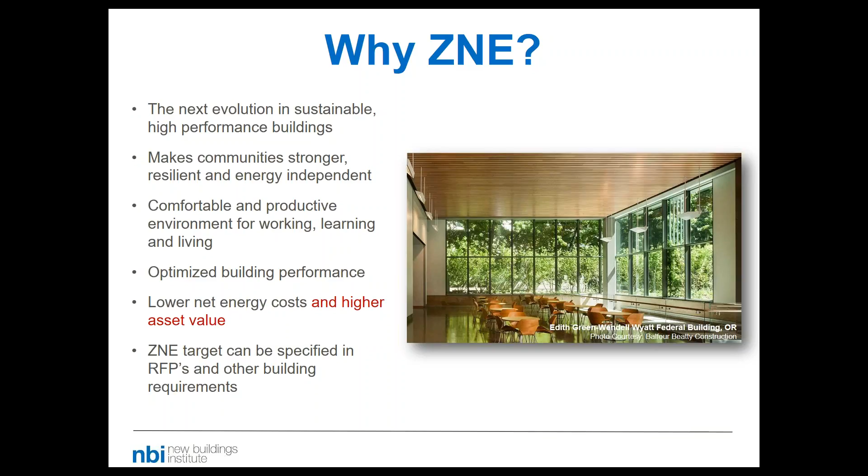You may be able to tell through this webinar topic that ZNE is gaining momentum. Via our Getting to Zero database, we've been able to track the progress of ZNE buildings. So for some background really quickly, the three types of ZNE buildings are ZNE Verified, which is a building that has 12 months of meter data that shows zero net or positive energy production over those 12 consecutive months.

ZNE Emerging, which is a building that has publicly stated a goal of ZNE, but has not yet demonstrated that they've achieved that goal. This building may be in the planning or design phase, currently under construction, in operation less than 12 months, or has not yet quite documented the ZNE performance over 12 consecutive months. And lastly, ultra-low energy is a building that has demonstrated significant energy reduction and technical progress towards goals of energy reduction, even though they may not have pursued ZNE originally or on-site renewables. Next slide.

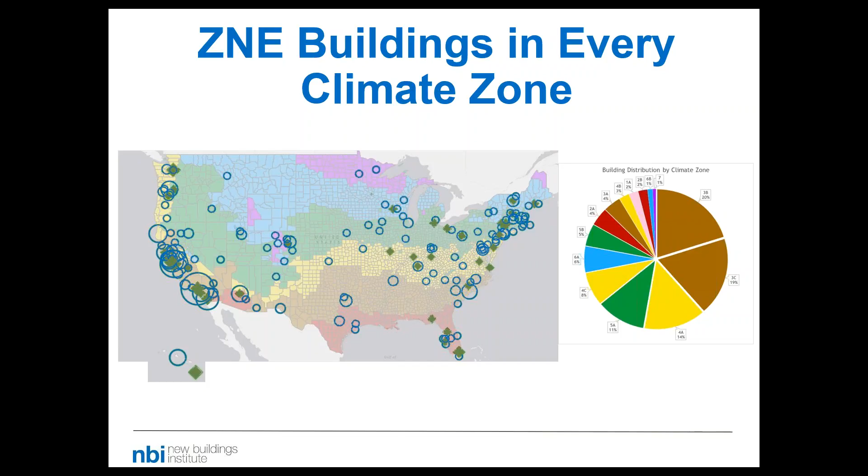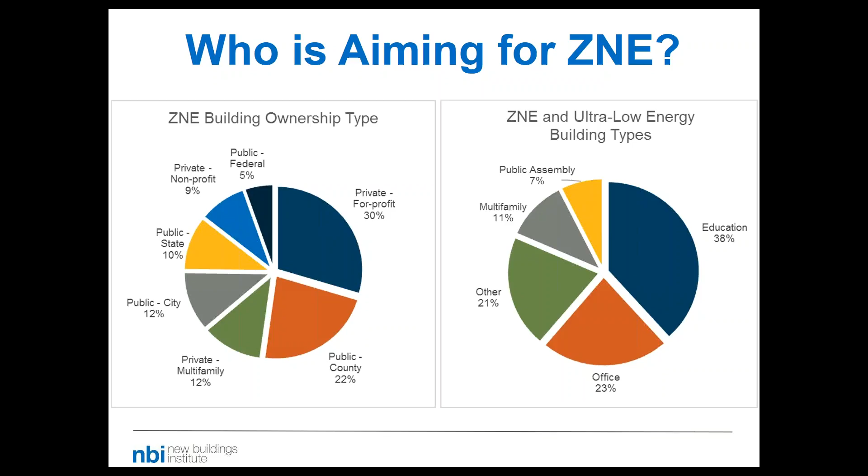So why schools? Why not? They are an ideal building type with low occupancy. They have sufficient land and they're owner occupied. Going ZNE is fiscally responsible with taxpayer dollars, and it puts more money back into the schools because of lower building operation costs and reduced need for energy. ZNE schools have increased student performance with better occupant health, attendance, and improved teacher satisfaction and retention.

They're more resilient to severe weather events and can create safe havens for the community. And as ZNE is not just about design but about operation, schools are the ultimate early adopters and set the example for future generations as operators of ZNE buildings. Schools house the next generation of environmental leaders, so going ZNE can provide hands-on project-based learning opportunities for continued student growth. Next slide.

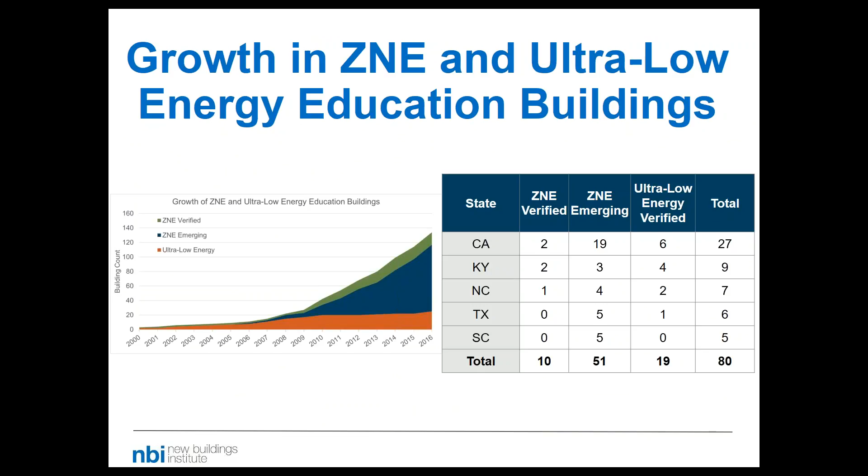ZNE schools are growing at a rapid pace. Since 2015, the number of ZNE verified, emerging, and ultra-low schools has grown by almost 40%, with California, Kentucky, North Carolina, Texas, and South Carolina leading the way to ZNE schools. Next slide.

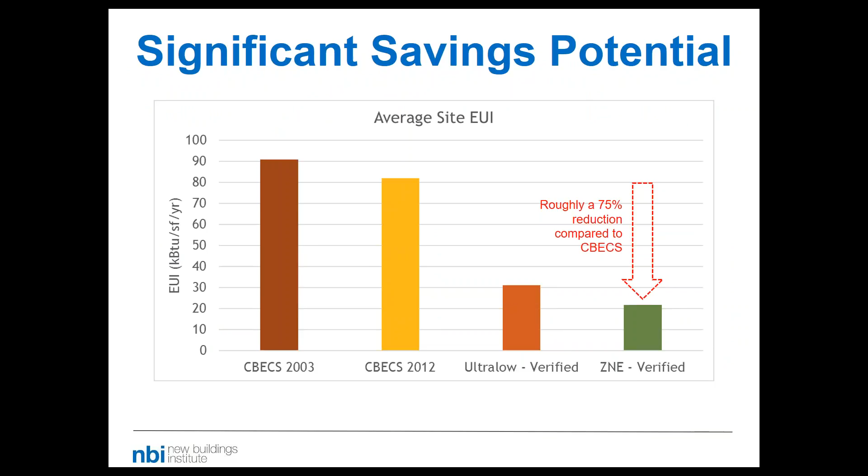The buildings or schools that are successfully designed and operated to ZNE can see roughly a 75% reduction in EUI compared to CBECS. This offers a significant reduction in energy use and a significant savings potential. Next slide. And because of these high-performing efficiency strategies, the average ZNE building has an EUI of 22 before renewables. That is across the ZNE verified, emerging, and ultra-low energy buildings spectrum. Next slide.

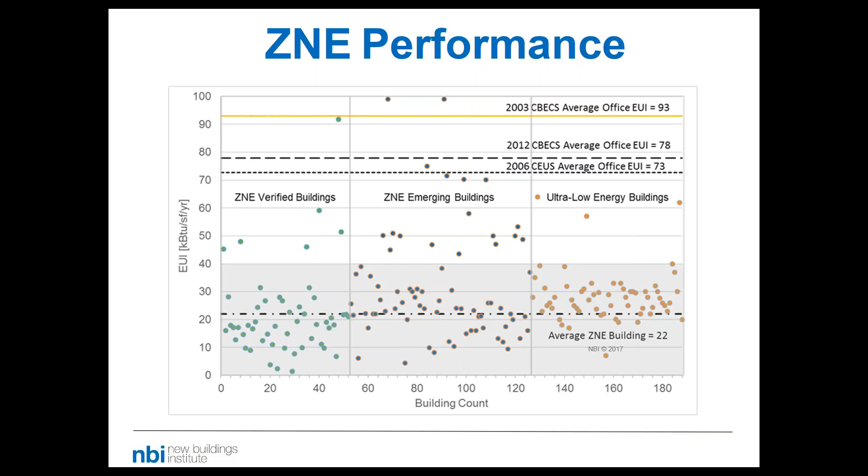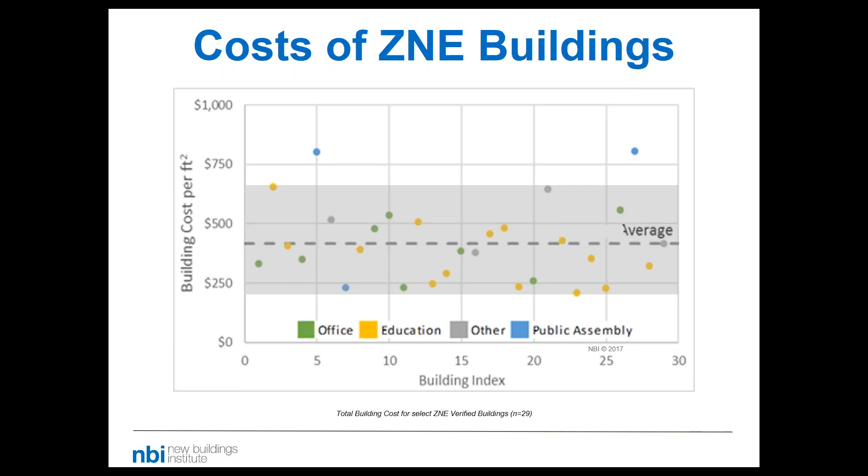Building cost varies based on location, building type, commodity cost, and the labor market. But the key takeaway here is that the costs are driven by many factors, including the growth of the ZNE market. ZNE buildings do incur an extra cost for renewables. However, our research suggests that ZNE can be delivered for around a 0 to 10% increased incremental cost. Next slide.

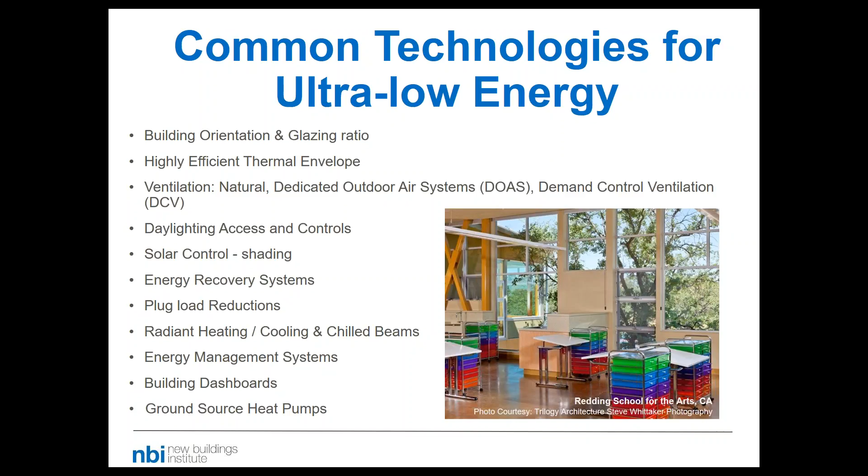ZNE is tough to get to. However, there are many resources out there and available through NBI and many others. Next slide. These resources out there are here to help you in whatever part of the ZNE process you may be in. Whether you're just starting and formulating your initial plans, have some ideas, have approached your district or your building owner, operator, or have finished design and construction and need to move on to the operations portion.

I mentioned our Getting to Zero list when I was talking about the database. NBI publishes a list every year of all zero net energy buildings. Again, if you have a project to share, please either submit through our online registry or by emailing info@newbuildings.org. Next slide.

NBI has also published a communications toolkit for engaging key stakeholders and to communicate effectively the reasons for going to ZNE. This originally was developed for the state of California but provides excellent resources for anyone across the nation or even in other countries looking to go ZNE.

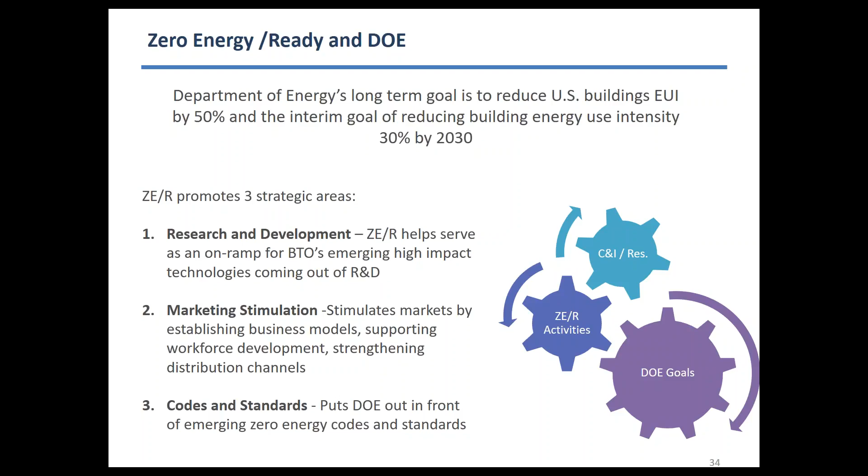So what does the buildings market, commercial market, look like right now? There are about 5.6 million commercial buildings comprised of about 14 principal building types, and out of that, 1 million new buildings were constructed between 2000 and 2012. And there's really no slowing down.

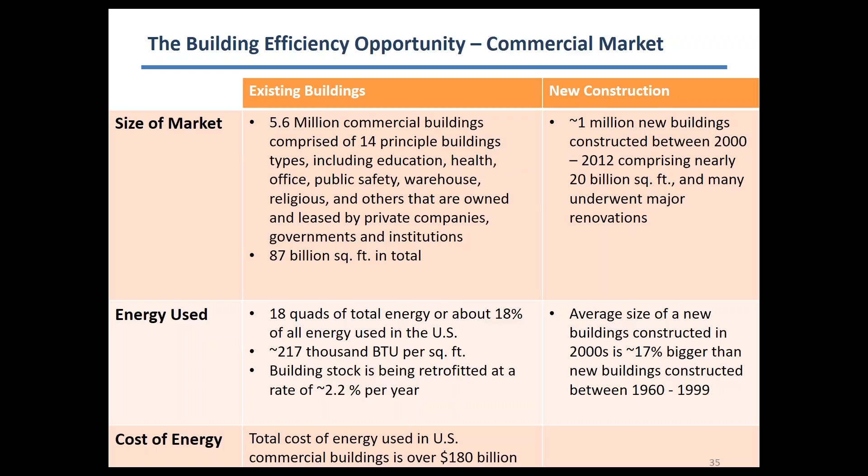And the average size of the building constructed in the 2000s is 17% bigger than new buildings constructed between 1960 and 1999. So what this means is, with more large buildings in the market, the more the demand for energy, which is also making energy efficiency a critical part of the work that we do. Next slide.

So once the Department of Energy started looking into the zero energy concept, we found that there was a lot of confusion in the marketplace. And to avoid that confusion, we felt it was our place to come up with a common definition for zero energy buildings. And we published this common definition in September 2015. And we didn't do this alone. We worked with a lot of other market leaders, including ASHRAE, NBI, AIA, NIBS, and the National Renewable Energy Laboratory. Next slide.

And I'd like to mention that if you Google common definition for zero energy buildings, you should be able to find this information. If not, the link is there. And again, this presentation is archived. So what is a zero energy building? In aspiring to build a zero energy building, you must first focus on energy efficiency. So you have to reduce your energy consumption by 50 to 70% from your code.

And we realize the gap between 50 to 70 is vast, but it's because we're trying to cover the entire country, and different states use different codes. But basically, you need to first target your energy efficiency, and once you meet the 50 to 70% less than code, then you are a zero energy ready building. And beyond that, if you are able to supplement the rest of the energy with renewable energy, then you are a zero energy building. So moving forward, please know that we are working on both zero energy ready and zero energy buildings, as we feel that energy efficiency is equally important.

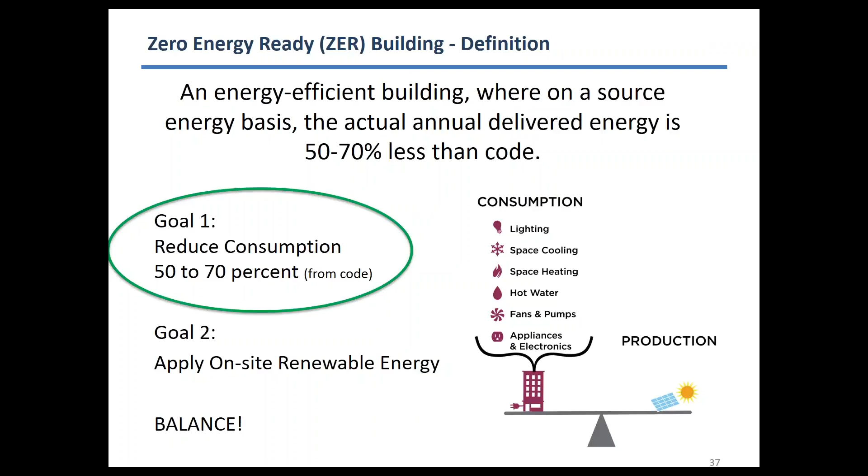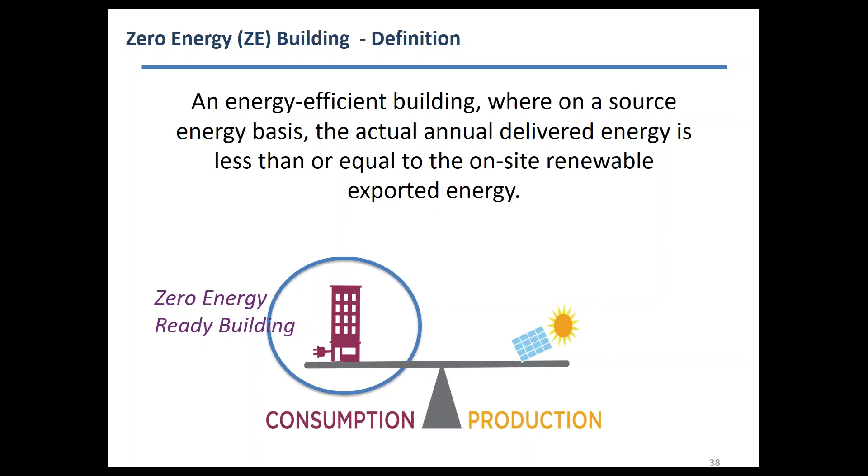Next slide, please. So by definition, a zero energy building is an energy efficient building where on a source energy basis, the actual annual delivered energy is less than or equal to the on-site renewable exported energy. And again, if you were to meet just the efficiency piece of it, you are a zero energy ready building. And when you add the renewable piece, then you become a zero energy building. Next slide, please.

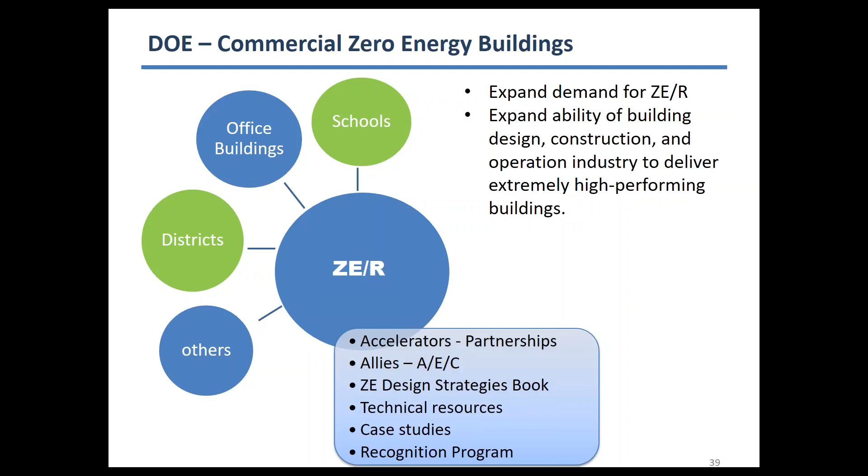So our goal at DOE when it comes to zero energy or zero energy ready buildings is we want to expand the demand, but while expanding the demand, we want to build the framework necessary to get there. So we're working on technical resources such as the case studies for pilot buildings. We're working on design guides, and then we've decided to focus on schools and districts, and I'll go into details about that. But we are also working with other partners from the engineering and architectural community, but also through other programs such as accelerators, to build and move the market.

Next slide. So we'll start with zero energy accelerators. Our vision, the bigger vision, what we would like to see is we want K-12 schools to provide healthy dynamic learning environments and resilient community assets that have zero to minimal energy costs. And so through what we call the Zero Energy Schools Accelerator program, we launched this program last December. We want to show that zero energy schools are possible within conventional construction budgets, but also we want to help the partners that we have recruited, states and districts, establish EUI targets to drive their energy efficiency, then also provide resources to accelerate their zero energy goals and get them there faster than they would if they didn't get our support.

Next slide. So Riley just went over this. There's a huge opportunity in working with schools. In short, one in five Americans sets foot each day in a school, and it's a unique opportunity to educate and shape the views of the new generation. But at the same time, outside of salaries, energy costs are the second largest cost to our schools. That's a figure of about $6 billion, and some say it's much higher, but that's the figure that we have right now.

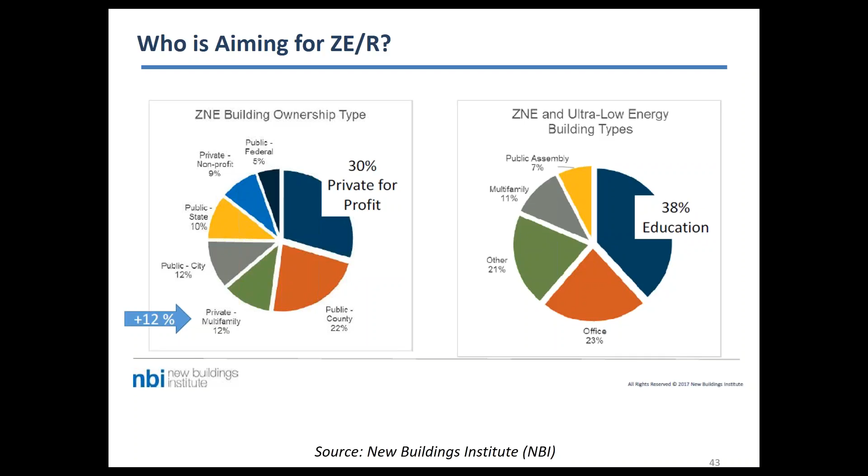In our approach in working with schools, one of the first things that we asked is: is it really possible to build zero energy schools from coast to coast within the US? So to do that, we worked with our National Renewable Energy Laboratory, NREL, to conduct a technical feasibility study. The study focuses on what technologies are required to achieve zero energy ready, and what energy use intensity, or EUI, targets schools need to focus on to get to that zero energy goal. This study was published in November 2016, and the technologies are prioritized across the building subsystems such that design teams can readily integrate the ideas. Next slide, please.

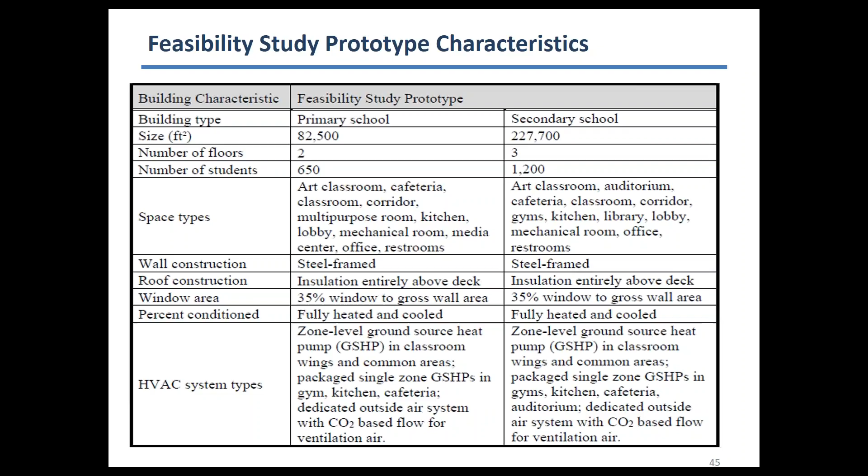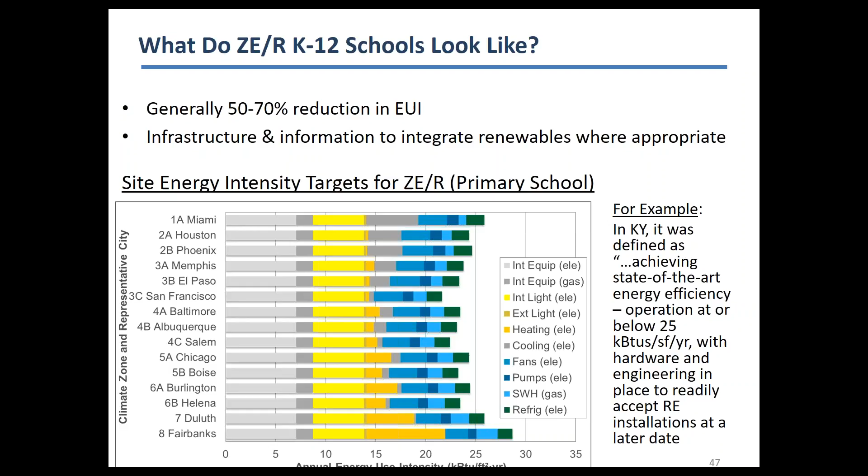Next, we will talk about zero energy districts. By districts, what we mean is a self-identified geographical area, and our vision for these districts is communities with energy efficient, resilient, cost-effective buildings and infrastructure that are common throughout the U.S. And with that, our goal is we want to work with these districts in their master planning, but also their financing and ownership structure. And so through that, we are looking to study their case studies, best practices, and pilot

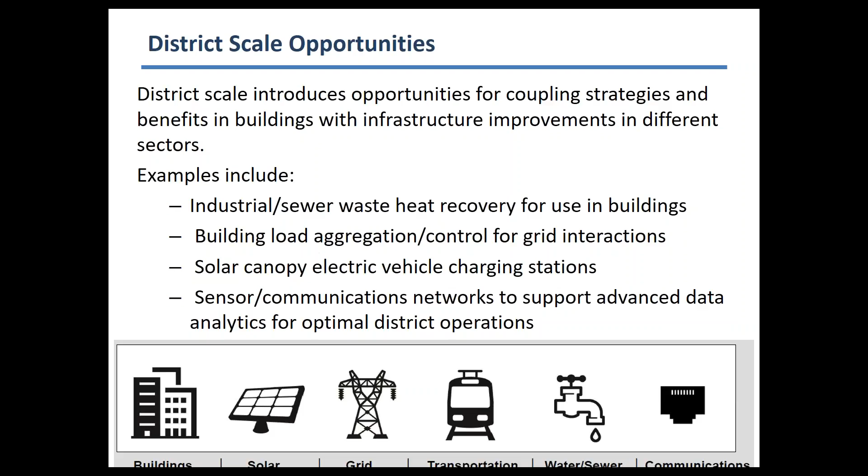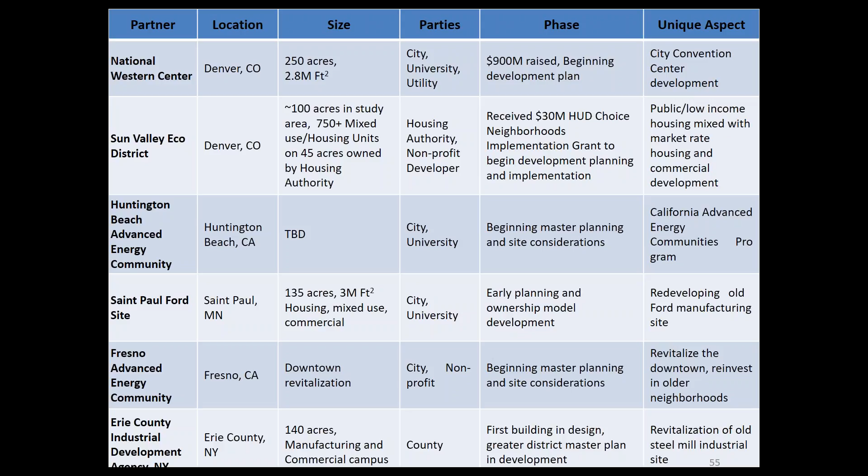And we're studying these projects so we can learn from them, learn best practices, but also how can we replicate these kinds of projects throughout the U.S. Next slide, please. So the tallest oak in the forest was once just a tiny nut in the ground. So basically what I'm trying to say is the zero energy concept is still new. And as Riley mentioned earlier, the majority of the buildings are starting to be built just in the past year. So we've seen a lot of growth, and the market is transforming, but we have to start from somewhere.

So I hope we're all in this on the road to market transformation, where these buildings are commonplace rather than a one-off. Thank you.

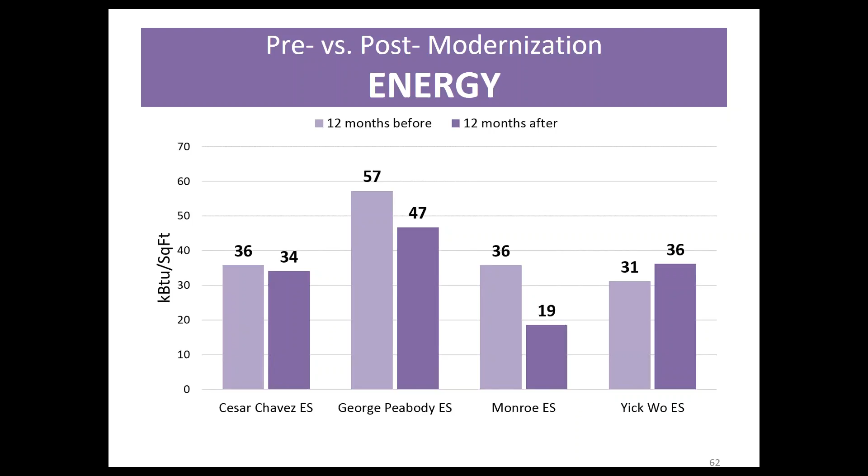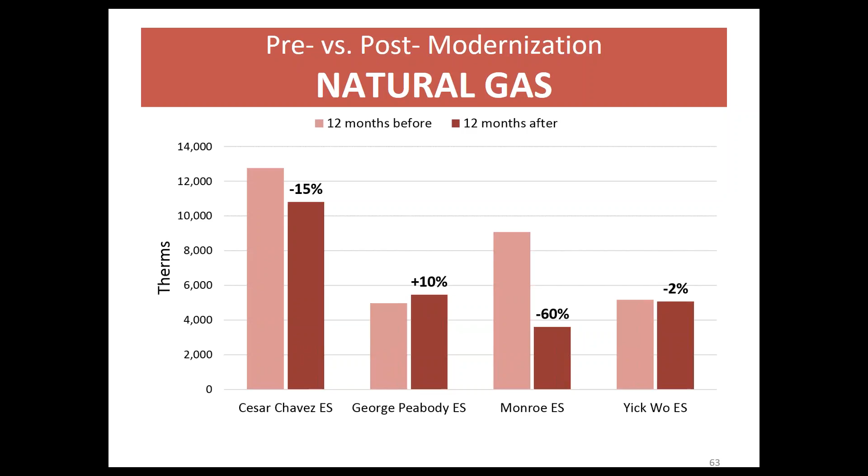Next slide. And we've done really well in natural gas. We're a coastal climate, heating dominant for energy usage. We actually don't have very much air conditioning in the school district at all. And so for the most part, we've done a good job of focusing on natural gas. The Monroe Elementary School example here, we had switched off of and actually gone to electric heating. So that was why that big drop occurred. Next slide.

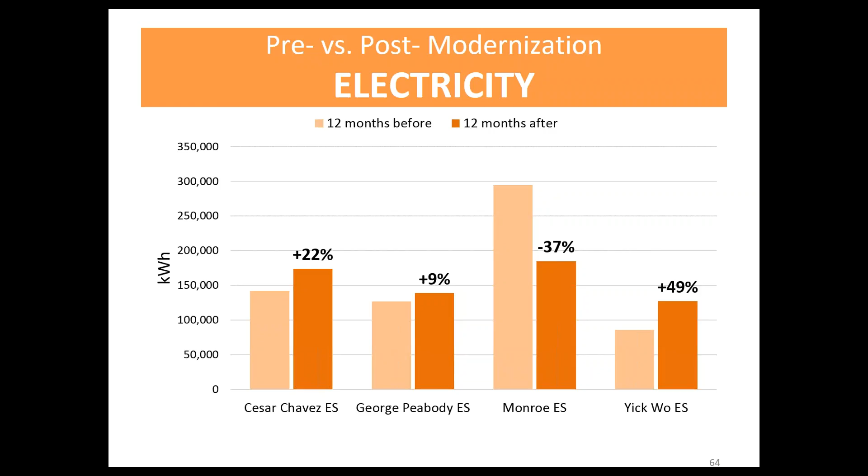And here we are on electricity. Electricity is a different story. Because our buildings are very old, some of them reaching close to 100 years old, you're bringing all these new buildings up to code, which means you're adding exhaust fans, you're adding new pumps, you're having new laptop carts, new plug loads. And for the most part, what we've seen across the board is that overall, in the EUI, we do a good job. But on the issue of electricity, we really have to focus in on this. Now the big caveat here is these schools were built and constructed right before the LED price curve dropped off the cliff, and so we totally anticipate once we get LEDs into new buildings, we'll see a major reduction. Next slide, please.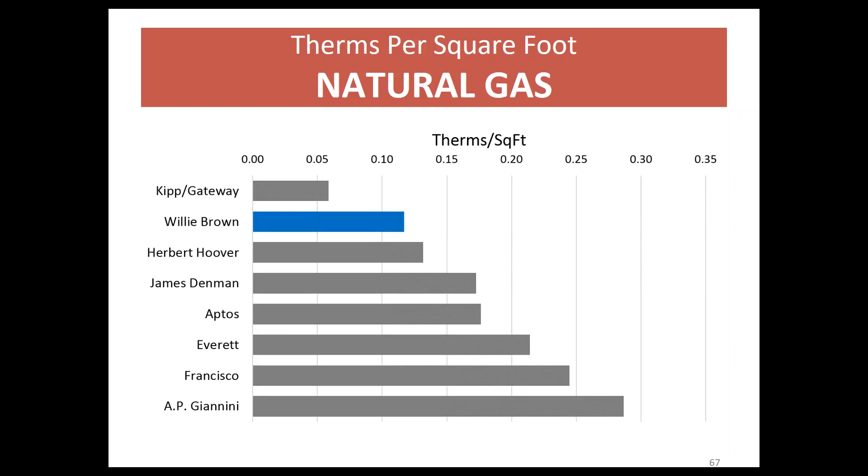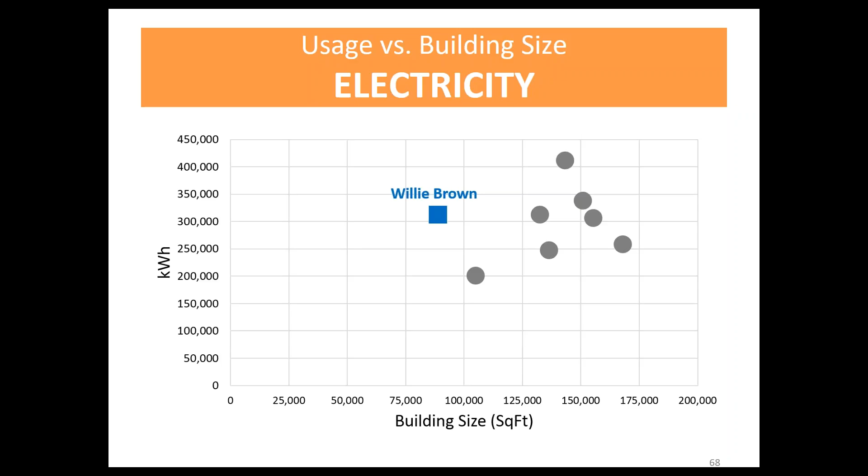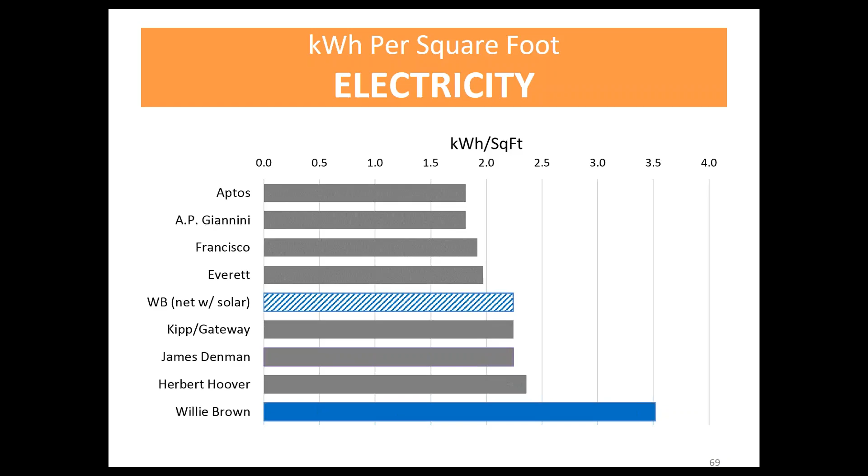But on electricity, we're right in the middle of the pack. This is a big campus, lots of design challenges during the process. Next slide. And we were seeing that, even designing this building 30% better than code here in California, on the electricity side, we are worse off compared to the rest of the middle schools throughout the district. Now this site does have solar, and once we get the solar turned on and grid connected, we expect to kind of drop down in the middle of the pack. Next slide. But this data that we saw from our 2011 school sites and our new construction here at Willie Brown was really the spark for us to focus on ZNE.

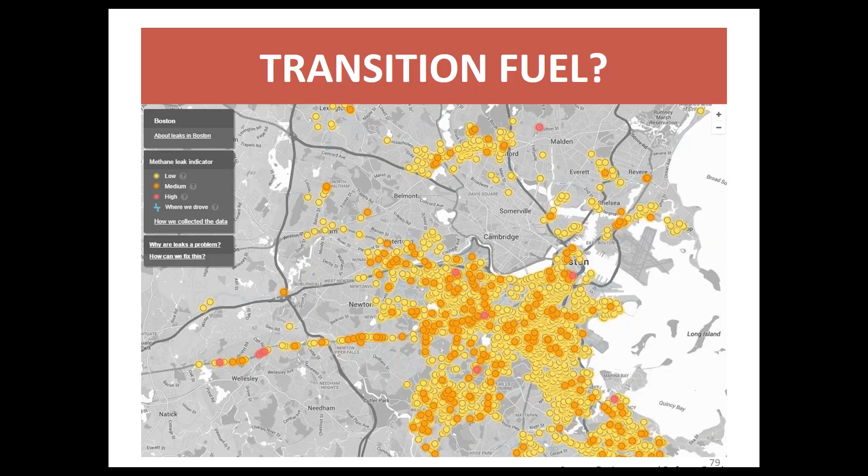And here's our stairway to ZNE. I touched on it really quickly in the last slide, but we're really focusing on implementing this process in a thoughtful, thorough way that all the departments, specifically our maintenance department, are really on board with. And so we start down here, and this is our shared savings. This is our behavioral engagement work where we go to school sites, teach teachers how to use their sites, do data analysis, little mini capital projects, and really focus on the low-hanging fruit. Then we're going to focus on the passive, really insulating our buildings, double pane windows, and do that switch to LED district-wide. And then for heating, we're going to slowly implement over the next 2 decades a switch from boilers to heat pumps, and then renewables, EV charging, and battery storage will all be a part of that future. Next slide.

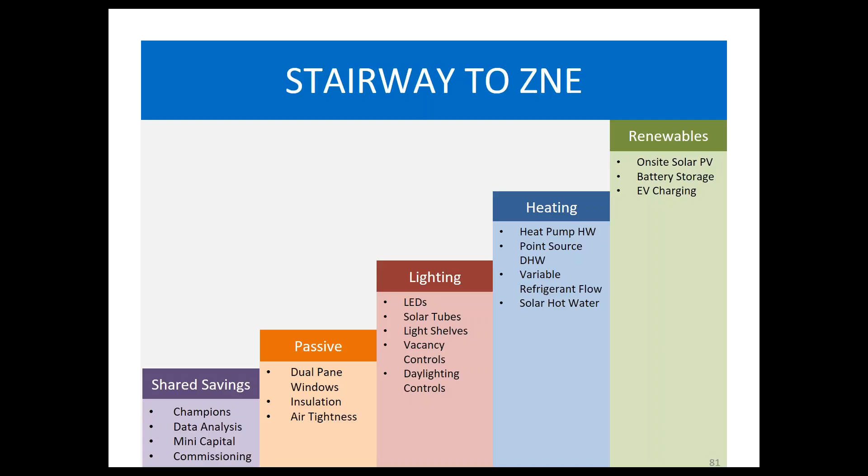And we're going to do this process through our standards and through our normal bond modernization process, and that's, I think, what we as a district are trying to convey to other K-12s across the nation, that you can do this process. ZNE is possible. You just have to have the conversations and start those conversations with everybody in the district and really work them into your standard practices, whether that be your standard bond modernization or your standard facility project, just general maintenance.

It is possible. You just have to have a thoughtful plan in which you as your school district and your departments are going to go about it. Next slide, please.

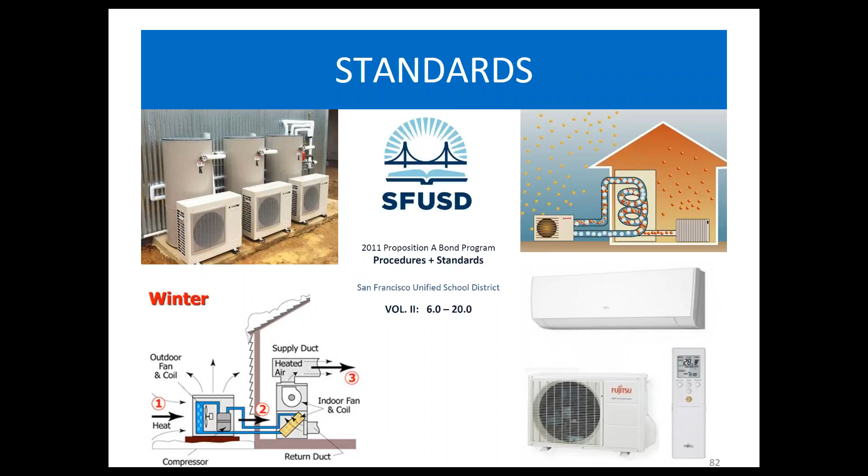And so as part of our recent bond process, we just had one pass in fall. We are going to have ZNE modeling reports done for each one of the sites, and these are a couple pictures here. You can see, if you look closely, that each one of the engineering firms is going to lay out different technologies and how those cost impacts will be on utilities, as well as how much they're going to lower our EUI. We have a target EUI for all of our sites of 20, and that's what we're really handing over to the architects with some guidance through an OPR and say, here you go, this is the goal, show us the way you're going to do it.

The other big benefit from these reports is we're going to be able to take these recommendations, whether it be electric domestic hot water heater or a zone level heat pump, and work with our cost estimators to see how that will work within the budget of the bond process. Next slide.

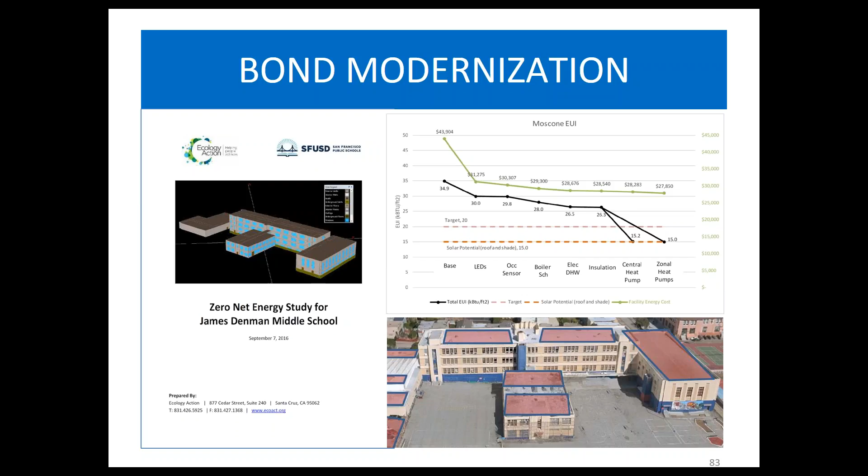But why stop there? Why stop at our buildings? Why not look bigger and beyond and really go after all our carbon emissions and greenhouse gas emissions? So facility energy use, which is primarily the natural gas for our boilers and domestic hot water heaters, makes up about 70% of our total greenhouse gas emissions. The other third of that comes from vehicle fuels, and we have a small vehicle fleet.

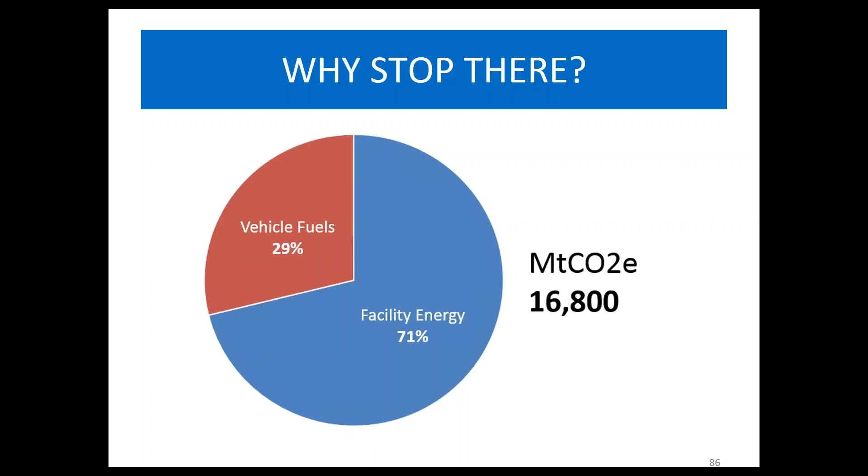Next slide. In which we're working with the different departments to really implement electric vehicles, and those are coming down in great costs. We have a great little video of us getting stuck on an electric van going up one of San Francisco's hills. Technology is getting there. It's improved. They actually did an over-air update, which allowed us to zip up the hill the next day. But we're really looking to implement this again over this long-term period of the next 2 decades. Next slide.

And we're going to be working with our local bus transportation to implement renewable diesel fuels, and that will be a part of our next bid contract with them. Next slide.

And so here's our carbon neutrality or zero carbon policy. Effective immediately, we're going to design buildings to be ZNE that are going to be new. No new gas heating systems will be installed. This will be major overhauls during our bond modernization process. And we're actually working with our local utility commission to retrofit opportunities when boilers do fail outside of that cycle to install VRF or heat pump units.

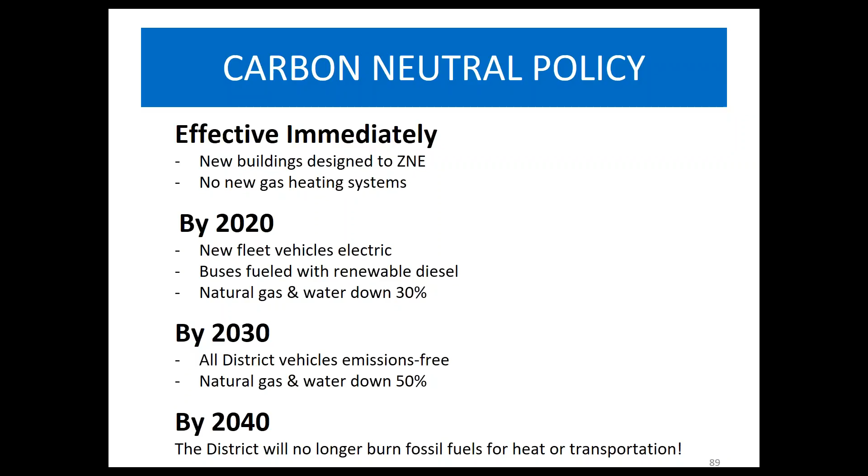By 2020, we're going to focus on only buying new electric vehicles. All our diesel buses will be burning or using renewable diesel. And we have an office goal of reducing our natural gas and water use by 30%. By 2030, district-wide, all vehicles will be emissions-free, and upping that percentage to 50 for natural gas reduction and water usage. And then by 2040, the big goal is to no longer use fossil fuels for heating or transportation throughout the district. Next slide.

And that's a quick wrap-up of what we're doing here. Hopefully this is kind of inspiring for other school districts.

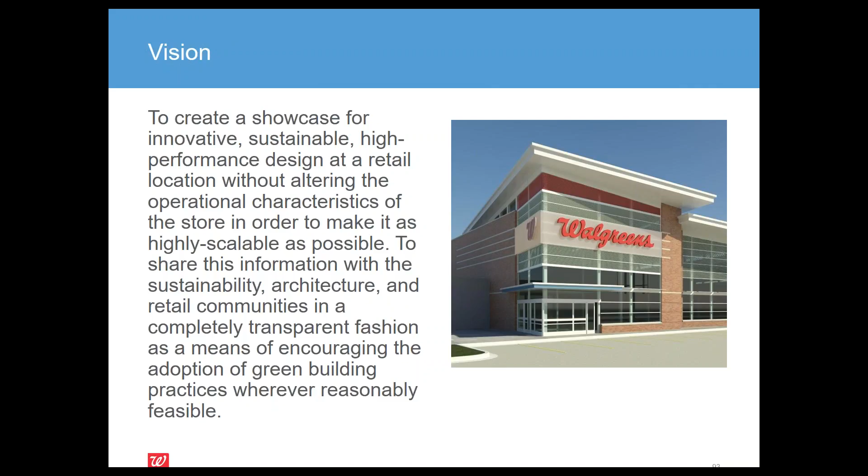So the vision for the project was written by our corporate person, but basically it was to create a showcase for innovative and sustainable high-performance retail design. The rest of it's all fluff, but some of it does have some meaning. But it was basically build the best building that we could with the most up-to-date designs and most energy-efficient ideas that we could come up with back in 2012. Next slide.

This is what the building ended up looking like. The elevation is facing west, so we have quite a bit of west-facing glass, which was not the best energy decision from a modeling perspective, but gave the look and feel that we were looking for from a building to really represent what we were trying to do. Next transition.

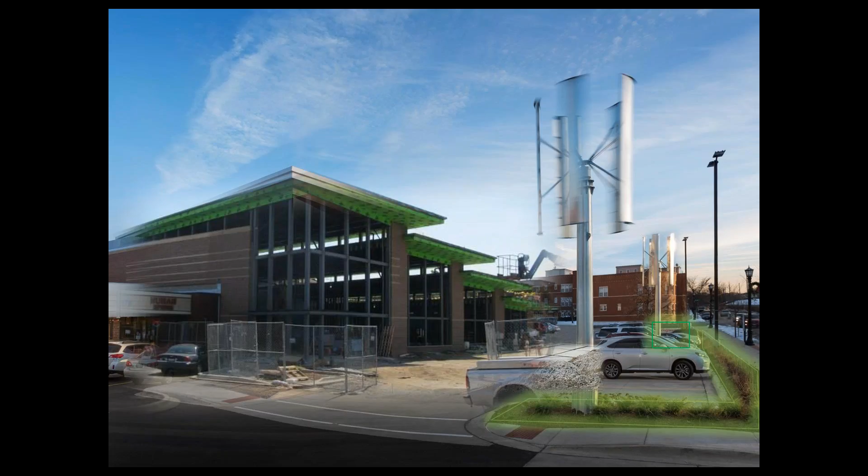There's some site features here. If we peel back what the finished facade looks like, you can see the amount of steel and structure going on inside of that building to support the unique visual aspects that we were going for architecturally. You can also see the turbines there, and we did native and adaptive plant species. In the parking lot, we did rainwater collection, which you can kind of see the cisterns there in the picture. Next slide.

But we also wanted the project to be LEED Platinum, to be a Better Buildings Showcase project, GreenChill Platinum, which is an EPA award for innovative use of refrigerants or reduced refrigerant use, Energy Star, and we needed to open before Thanksgiving in 2013, which was just 14 months total for design and construction, which was a mistake in retrospect. Next slide.

So our energy reduction strategies are going to mimic pretty much what you've heard throughout all the other presentations. We needed an ultra highly efficient mechanical system as well as refrigeration. We have a walk-in cooler and freezer that does both merchandising and storage of product, and on this location it was nearly half the length of the building. We used 8 geothermal wells, each 550 feet deep, and we also used all LED lighting on this project, even though it was not quite ready to go full stream in terms of every single fixture. We did go ahead and make that decision back then to go all LED.

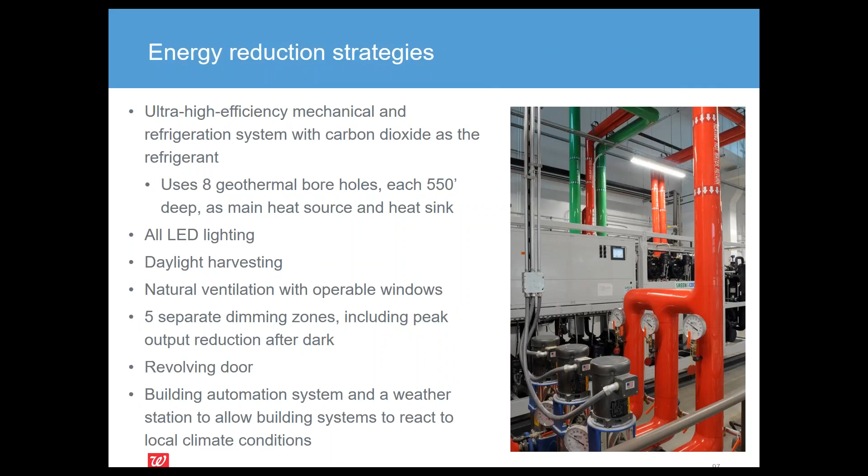We did a revolving door, which is not typical for a Walgreens, but did save quite a bit of energy in those winter months for infiltration. And we did a full-blown building automation system with every single circuit monitored for energy usage so that we could understand how the building was actually performing versus design. Next slide.

So my one thing that I could go back to after doing this project was that try to keep everything very, very simple, but some things can't be made too simple. So keep everything as simple as possible, but not simpler. Next slide.

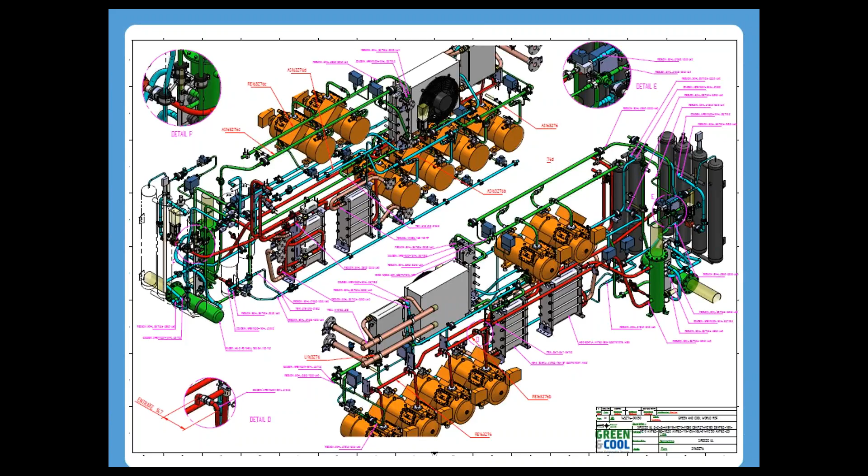And that brings me to what our mechanical system looked like. So it does not look very simple, but when you look at that, this is the total schematic of everything that gets hot or cold in the building gets run through this one machine. Next slide. There's a picture of that up on our mechanical mezzanine, what that looks like in real person, and that space is publicly tourable. Next slide.

So this is the schematic of that system, so it doesn't look as scary like this, but basically all of our hot water, domestic hot water, heating, chilled water going down to our freezers and coolers with direct CO2, and all of our geothermal loops are tied in through this one transcritical CO2 rack. Next slide.

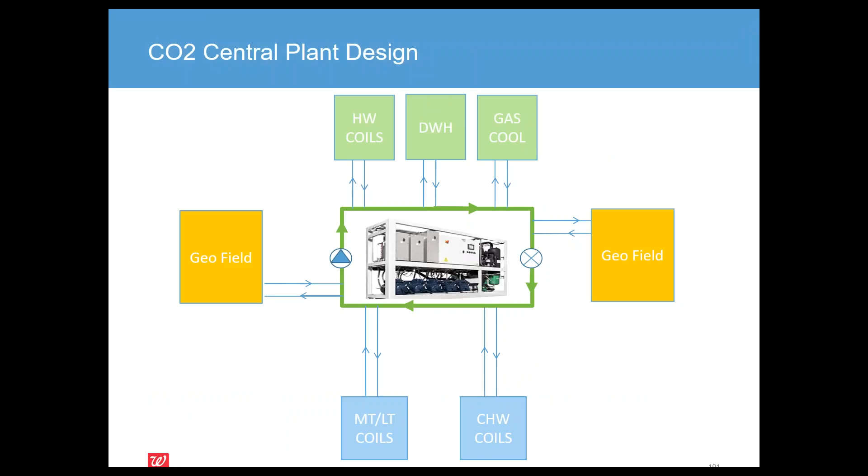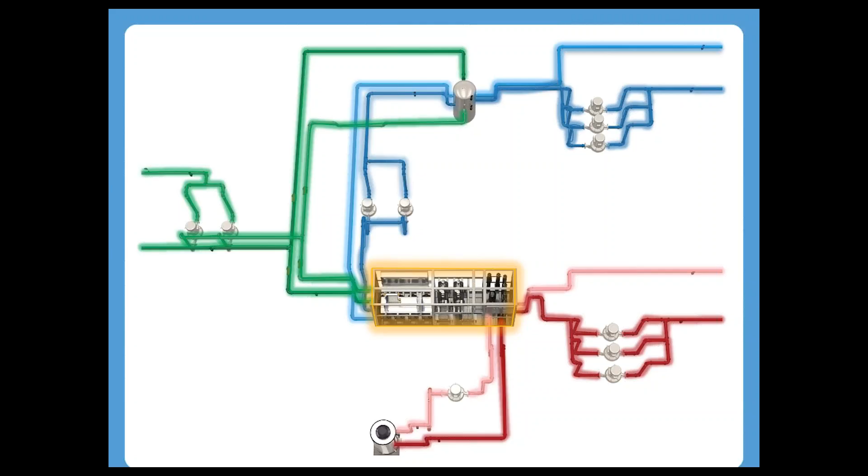So the green highlighted pipes here are all the geothermal connections. The blue are chilled water. The red pipes are hot water and domestic hot water. And that's how they all integrate back into this one kind of thermal management system for the building. So all the heating, cooling, and refrigeration loads are done together. Next slide.

The building wasn't just about trying to achieve net zero. We really wanted to do everything possible to have kind of an environmental awareness showcase. So the existing building that was demolished, we recycled 84% of it. We used adaptive plant species, all low flow water fixtures. We collected all of our stormwater on site into the cisterns and didn't discharge any into the city's stormwater system, which is a pretty big issue in the area of Chicago because as the cities have grown, the stormwater systems have not. So we tend to overwhelm city stormwater systems in the area.

Low VOC fixtures and finishes were used, as well as we put in electric vehicle charging stations for people with those Teslas that are so cool to look at. They have a place to charge. And then we also did educational signage throughout the site, including outside, inside, basically anywhere a customer can go, there was signage. And that ended up being more important than we even thought because it was one of the main ways that we interacted with our customers. Next slide.

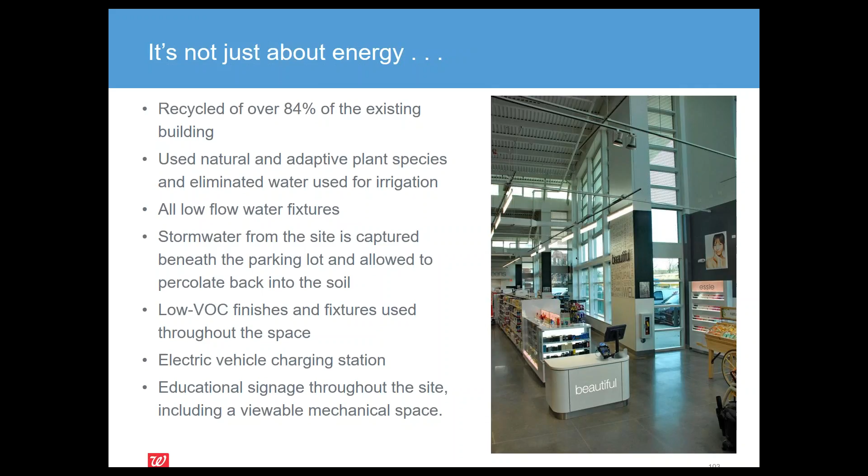So the results, you can see at 100% what our typical Chicago average EUI would look like. We did our first geothermal store in Oak Park, which is also a Chicago suburb, and we achieved roughly a 40% energy reduction just by doing geothermal. The detailed energy model on the right of where we hope to be, which was a 60 to 70% reduction, and where the first 12 months landed in, which was just a little bit better than the geothermal store. Next slide.

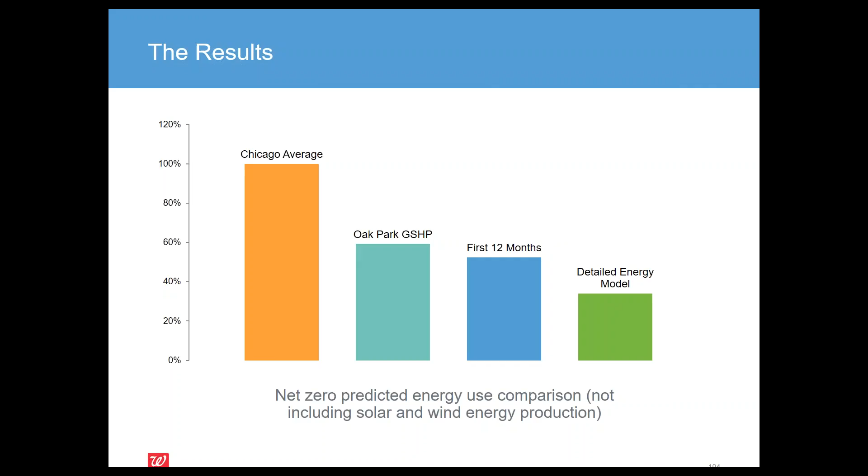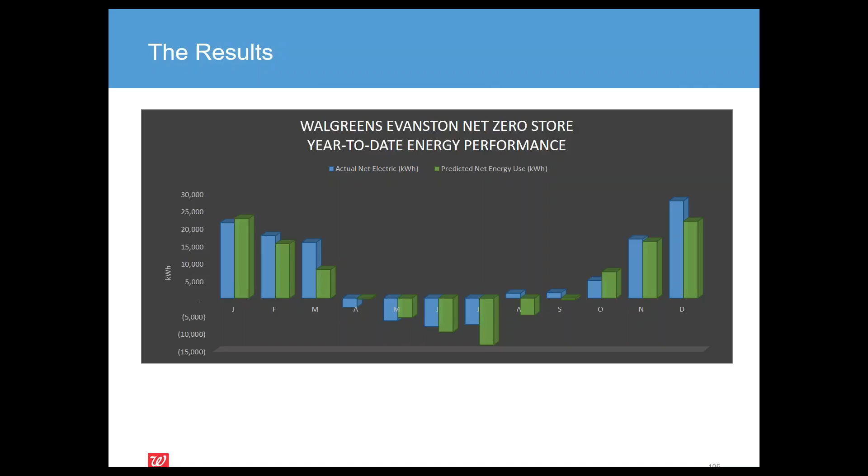This is the first 12 months of operation. The blue is our actual net energy usage, and the green is the predicted. So you can see that we weren't too far off of where we wanted to be. Generally, the curves kind of look like each other. It just didn't do exactly what we thought, and we continue to learn why. Next slide.

So our typical EUI in Chicago is 105. We were predicted through all of our modeling, based on what we knew when we were designing it, to be an EUI of -5. The first year of operation we had an EUI of 20, and the last 12 months or 2016 we had an EUI of 15. So we're still a bit above net zero, but one of the things that did not get accounted for was those electric vehicle charging stations.

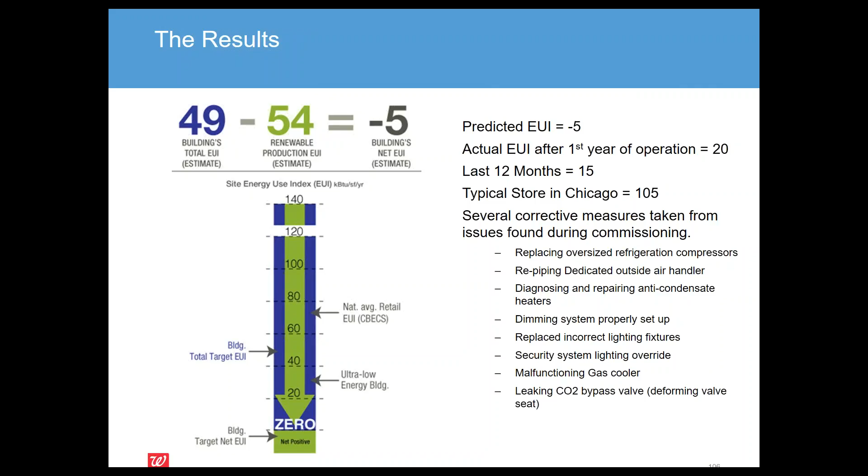We didn't predict that they would be used as much as they had been, but we have a Nissan dealership just a few doors down, and they found out our charging stations are free. So they got used quite a bit more than we expected. If you remove the electric vehicle charging stations from the building usage, the EUI drops to about 5. So there's a couple things that are still going differently than expected in the building that are being worked on to address, and we hope that within the next 18 months we'll have 12 months of net zero performance. Next slide, please.

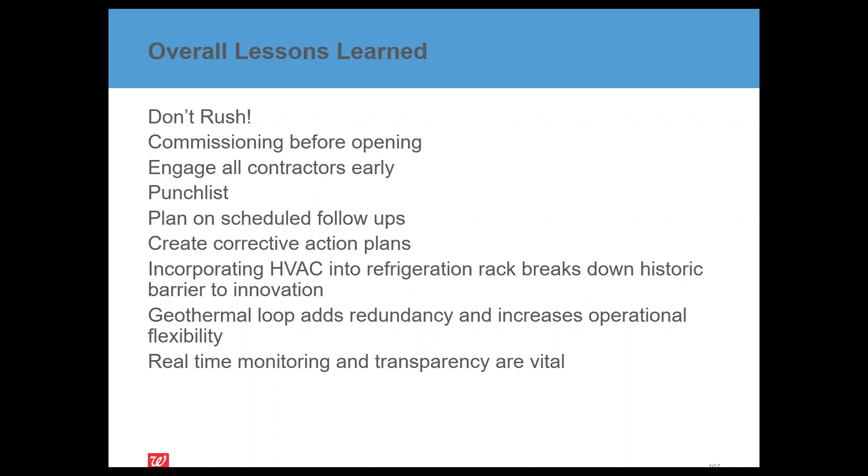So our overall lessons learned is try not to rush this. Commissioning is very important, and it needs to happen before you occupy. Engage your contractors as early as you can, and kind of try to expect the unexpected. But this was a fantastic project to work on and was really cool to be a part of it. Next slide.

So this is a picture of the inside of the building. You can see that glass on the back wall, that's the mechanical mezzanine, where that's publicly tourable space. You can go up and see what's going on. And you can also see the clerestory windows between each elevation. Those are the operable windows, so those open and close as controlled by the building automation system.